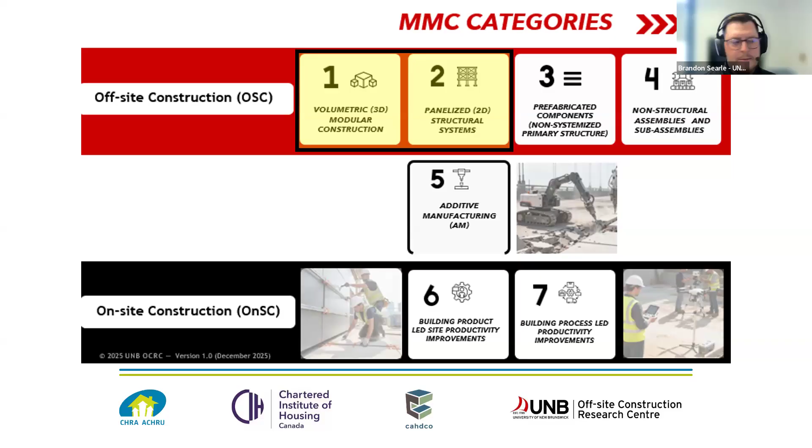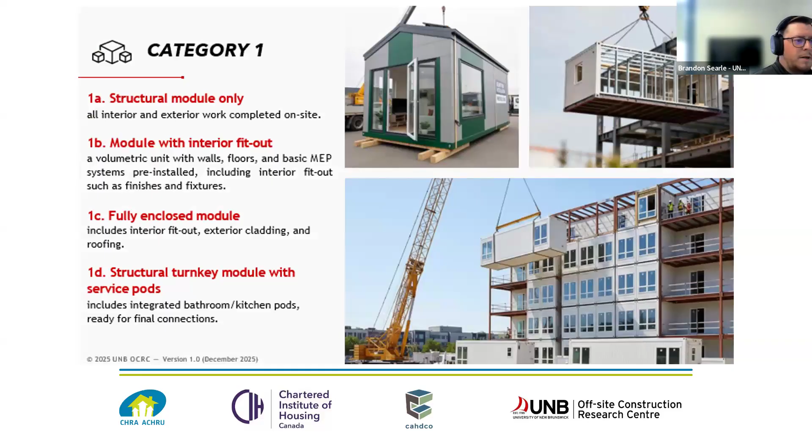Just a reminder of what's enclosed in those. Category one is structural module only, the module with interior fit-out, a fully enclosed module, or a turnkey module with service pods. Category two is structural framing panels, insulated panel systems, a fully integrated panel—so completely closed, I'll say open and closed panels quite a bit—or externally finished panels.

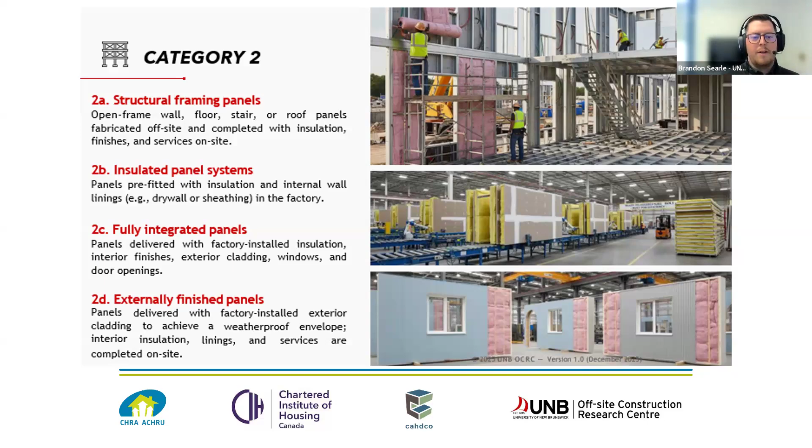So just to note, procurement processes do change a little bit and can be impacted depending on how much, or at what level, of MMC you want to use, or what percentage of it is built in a factory. Last week, I introduced this definition of modern methods of construction, or an offsite construction integrator.

Our experts, the Q&A experts, or the case study presenter later, may or may not talk to this, but it's just a reminder that the integrator can be a general contractor, part of the design team, a new entity that's part of the project team, or sometimes the manufacturer. They have expertise in leveraging modular or prefab methods in a project, and they get involved right from the get-go, often in a relationship like owner to integrator.

And then, Canadian MMC manufacturers: any entity that performs the manufacturing activities within Canada, regardless of whether it is a subsidiary or a foreign company, et cetera. Just mentioning those in case you wanted to use them yourself—those definitions are direct from Natural Resources Canada, from the new offsite construction challenge program they launched a couple weeks ago. So you can use that in an RFP or challenge program that they put out.

When thinking about the MMC integrator, I'll admit I used generative AI to produce this graph—I just wanted a simplified version to show this, but take it as a conceptual figure. Essentially, you can go from an open panel system, which is often about 20 to 25% of your building built off site in terms of project value or building costs, right up to about 90% complete when you go to full volumetric modular. This is based on experience we've had with our industry partners: as more project scope is done in a factory, the importance of that MMC integrator seems to increase. I don't know if it's linear or exponential, but I asked for an exponential curve today, so that's what we ended up with. It's just really important to mention that.

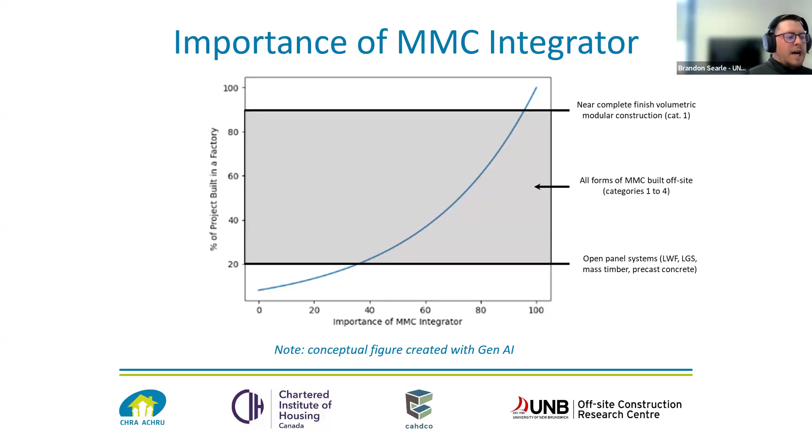And then beyond that, the role of the MMC manufacturer - I want to mention this can be both project and company specific. I've worked with some companies who historically do a lot of single family homes, but they've done a full hotel and managed the whole project.

Whereas I've worked with others who tell me they prefer to only focus on the scope of work that's in the factory. They like the civil work to be dealt with by the general contractor, and the fit out, installation, shipping, storage and everything else dealt with by someone else. We like to focus on what's in a factory. So it does vary a bit.

But in general, we view it as four different roles. They could be the prime or GC, where they do design assist, civil, responsible for manufacturing, delivery to site, install, fit out, handover, everything. They could be the subcontractor that does design assist, manufacturing, and delivery to site, installation and fit out. Or the subcontractor that does design assist, manufacturing, and delivery to site.

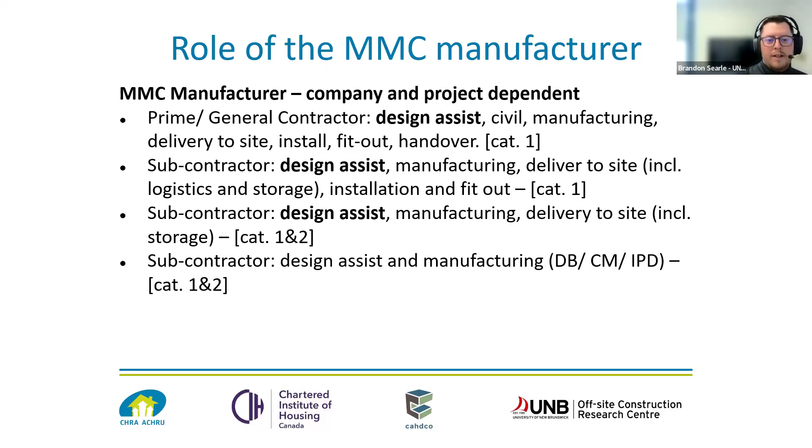Or the last one, which we've seen to be the most successful when you get into the MURB projects, is they're involved in design assist and manufacturing. I put in bold the design assist piece - when thinking about how you're procuring modern methods of construction projects, particularly volumetric modular, it's vital to have that manufacturer involved in the design phase, which does influence how you procure.

I'm repeating myself here, but regardless of the project, design assist is key to leverage all the benefits that modern methods promises. We've seen in open panels and other panelized systems where there's no problem for them to bid on a framing scope of work, whether or not it had been designed for panelization, but you're not optimizing it to its full potential, and optimizing industrialized construction to its full potential.

What we've seen is particularly on projects larger than 8 units - and again it is company specific - each group in the value chain should be responsible for what they do best. We've worked as a research center with over 25 manufacturers across the country, and the majority say if we had an order book and could stick to being responsible for what's in the factory, we can maximize our potential and benefit to the sector.

So many prefer to have an integrator, design team, and a general contractor that already has expertise in this, and leave all the site work to them. If it's a multi-unit residential building, I've heard varying opinions, but in general I've often heard if it's above, say, 8 units, involving a general contractor who has local trade relationships, expertise working with the authority having jurisdiction, and doing all that site prep, installation and fit out is quite important there.

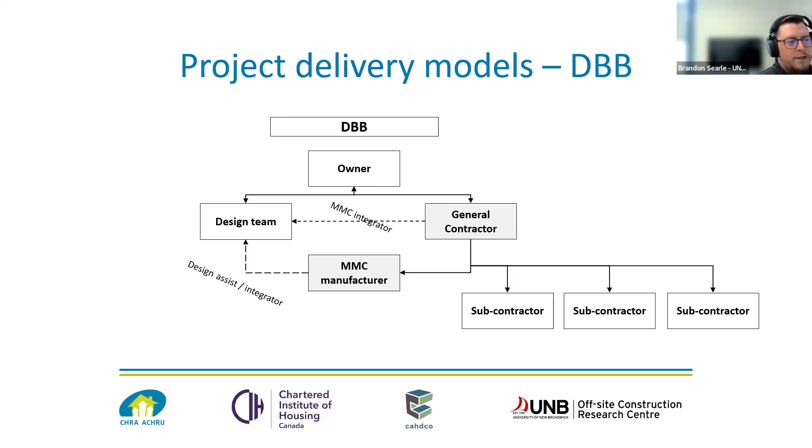So ways to do that is really in a design build. In this case, you would bring the design team, the GC, and the MMC manufacturer into a DB team, and you'd procure for that.

There should be a line from owner to DB team. Sorry about that, no one would have noticed if I didn't point it out.

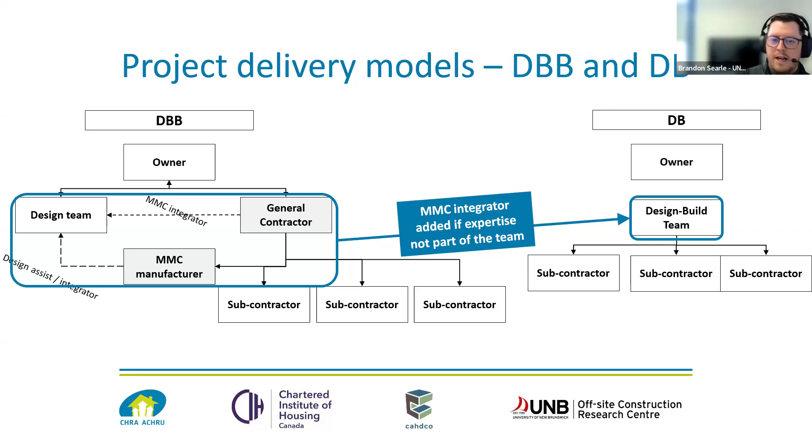There's a project here in Charlottetown I have a picture of later, where they involved the MMC integrator because they had a local general contractor, regional manufacturer, a local architect and engineering team involved, but none of them had as much expertise with doing a 6-story modular building. So they brought in an MMC integrator who's educating the general contractor, has a super and PM on site, educating the owner, and involved in the manufacturing process.

Some challenges: again, if the MMC manufacturer is excluded from any design development discussions, you won't leverage the real benefits. Longer linear duration and schedule, reduced communication between design and construction, often results in more extras. A lot of research demonstrates that. And prescriptive design does not allow innovation or as much innovation in alternative proposals.

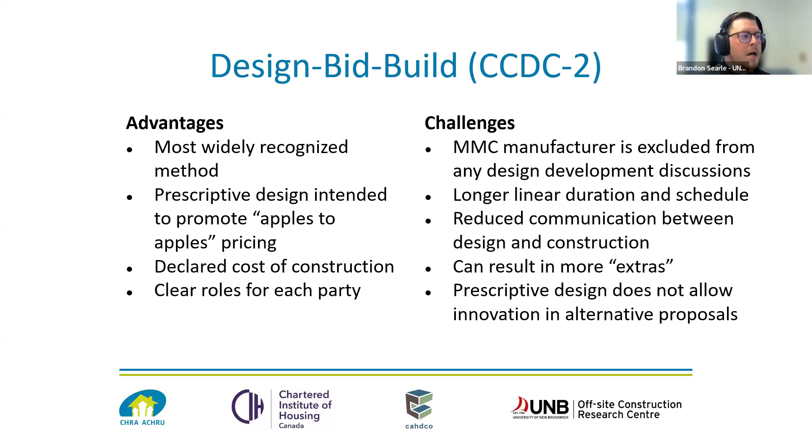From a design build side, the owner contracts directly with the design builder. The architect is contracted by the DB. Integrated design with the MMC builder. Suitable for fast track with immediate feedback and team collaboration throughout.

Challenges, which I really want to emphasize, and Paige has educated me on as well: the proponent must invest significant time and resources during the design phase, and it's not aligned with many programs for affordable housing development. If you're curious what that means in bold, you can ask Paige.

Owner must state a maximum ceiling price, or things can get a bit out of hand. And owners share the design approval responsibility with the DB team, which pushes up more responsibility onto the owner at times. The last one too, which Paige kind of touched on, I believe, is procurement policies.

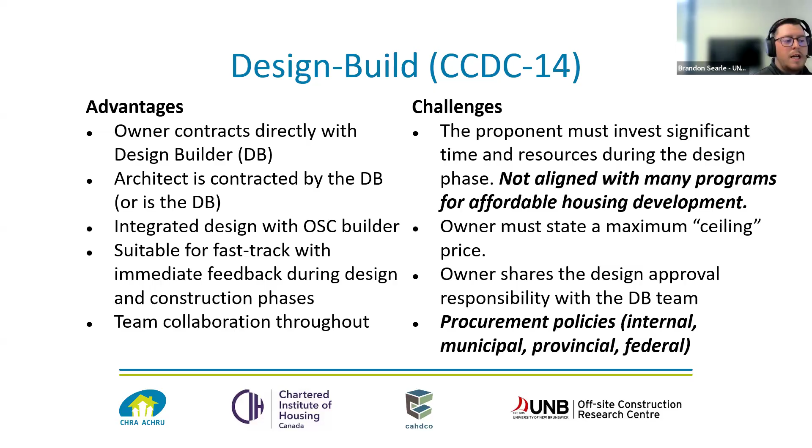There's often programs that nonprofits, housing providers leverage, have their own procurement policies. Municipalities do, federal programs do, and so on. And plus, there's internal ones. So sometimes that becomes a challenge to use DB.

Lastly, I'm just going to go through it really quickly, but IPD is being talked about, particularly in the institutional sector, so schools in particular, and a little bit in the commercial space as well. What I've been told is that this will often produce the best project.

But it's not necessarily the best value for money. So you'll get the best product, but you'll also likely spend the most. And so in this case, you'd have the MMC integrator, the design team, the GC, the MMC manufacturer, as well as the key subs involved throughout.

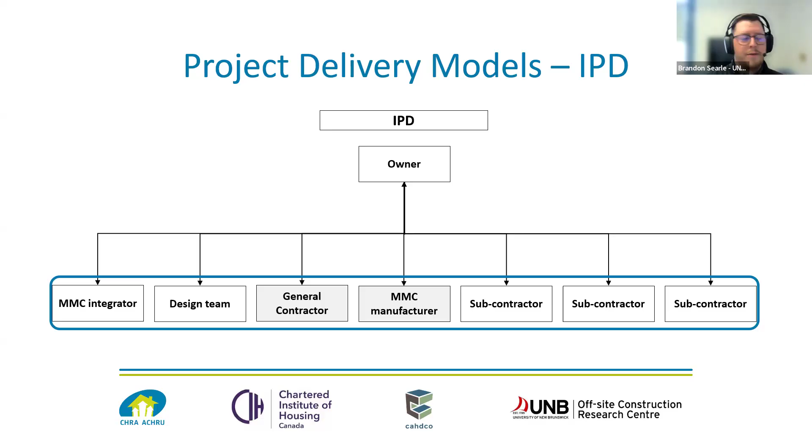Some challenges - a lot of the advantages are a bit similar to DB, but challenges again, not aligned with many programs. There's a lot of trust required, particularly among the IPD team. You're only as strong as your weakest link, and must set a max price as well.

A few other project delivery models that we mentioned: obviously there's cost plus, construction management and construction management at risk. CCDC 5B is what the project was that I referenced on campus here that leveraged mass timber.

And again, to leverage the benefits of MMC, the most effective is when the contract model allows for design innovation, collaboration, and incentivizes time savings. So that's really key when you're looking at this and going a bit beyond a lowest bid wins approach in your design.

This one might be a bit too detailed, but first off, that project is one of two six-story projects in Charlottetown, PEI. It was a design-build project where you have an MMC integrator and the full team involved. I can share more about that project if folks are interested.

DB is the optimal choice because if you're not involved in design-assist, converting from conventional to MMC is very difficult. We've seen it across the country recently with a large developer in the GTA who converted from traditional ready mix concrete to a precast solution. DB allows you to engage the MMC manufacturer early.

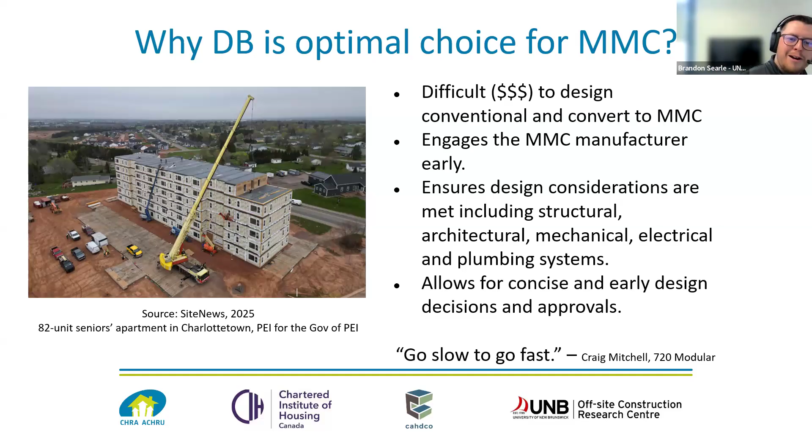I think I mentioned this last week—having design complete is vital before you start manufacturing, because once you start, for example a 16 unit apartment took less than 2 weeks for all those modules to be built in the factory and delivered to site. Craig Mitchell, our Q&A expert next week, always preaches 'go slow to go fast'—meaning go slow in pre-construction so you can go fast during construction. He'll probably speak to that next week a bit.

A few other considerations when looking at the contract for DB and leveraging MMC: payment terms are key. I've seen them more in volumetric, and maybe some of our Q&A experts can speak to this, but they seem to vary, often requiring a down payment early on. Then there are different progress claims that aren't necessarily tied to site progression, but might be tied to completion in the factory. Change orders after design become a problem because they're much more costly once everything is already done and manufactured.

Progress and milestone draws are again tied to your payment terms. Delivery to site—sorting out who's responsible for that and who gets paid at what time can be tricky, especially if the manufacturer isn't responsible for the civil site but isn't getting paid until the module arrives on site.

Transportation, storage, and logistics—I've heard of that becoming an issue on a variety of projects where environmental factors, whether it's too windy to leverage the crane or whatever it might be, cause problems. So that's something to talk about. Maybe Martin can speak to that later.

Then there's the payment certifier. Our Q&A experts could probably speak to this better than me, but I've seen the MMC integrator act as the owner's represented payment certifier. They'll have someone located close to the factory monitoring progress, which tracks how far along it is and when to release payment for the modules.

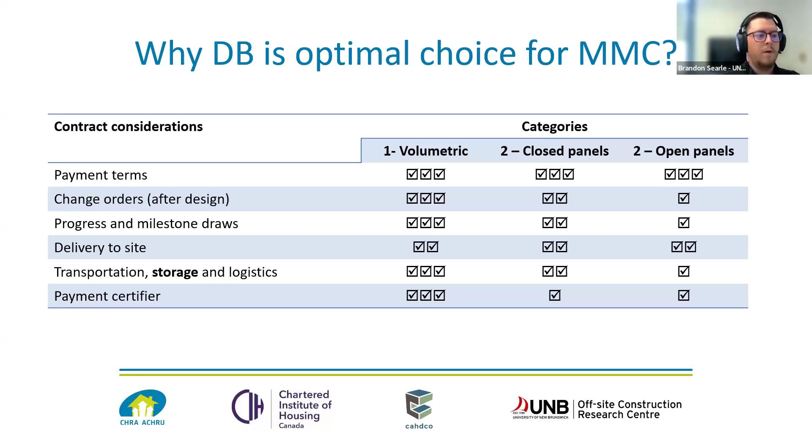Some key takeaways: the type of project delivery and contract depends on geography and project type. There's no one size fits all. Here in New Brunswick and Quebec, the volumetric modular industry is quite mature. In BC, mass timber is mature—it's specific to your region.

An RFI or RFQ is a good starting point. I've heard of some architecture firms doing this and creating their own internal database, almost like this prefab navigator. I'd love to see BC Housing, out of this RFI they announced, create a database that the whole industry can use with details on who does what well.

The GC, manufacturer, and MMC integrator need to figure out who takes on the role of integrator—go back to that definition and decide who's best to do that. It's less important in my opinion with panelized, but talking with that panelized manufacturer, they might be able to educate you on that process. Involve the MMC manufacturer in the design stage—DB presents the best opportunity to leverage the benefits around speed, cost certainty and predictability, safety, and sustainability.

Obviously, those key challenges need to be addressed, and finally, ensure you resolve those contract challenges for design and payment milestones early so that you can leverage it as much as possible. So with that, I'm 4 minutes over time. I'm going to wrap up and hand it back to Paige to run the Q&A with Martin and Nicholas.

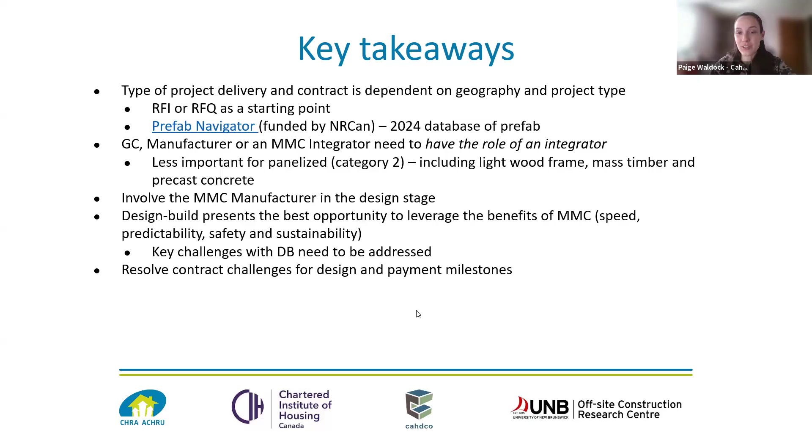At this point, I would like to welcome Nicholas and Martin from EllisDon Community Builders and Maison Bonneville, respectively, to join us. I'm going to ask both of you to give us a quick understanding of who you are, who you work for, what your job is, and why you're here today.

I'm the Director of Public Affairs at UTILE. I've been working in affordable housing for 4 years now. I am a political scientist by trade, so if you have very specific technical questions, I may not have all the answers, but we've been working with Bonneville, so maybe Martin can help me with the more technical questions. I'm glad to see you here.

The presentation plan for today: I'm going to very briefly present who UTILE is and what we do, then present the case study of the modular project we did in Rimouski, delivered in September 2025. Then I have some recommendations on how we can collectively unlock the potential of manufacturing processes in housing. This is a bit of a macro presentation, in the sense that we used the Rimouski project to do research and development on modular construction, and drew some conclusions on what we need to do as an industry to drive the cost of modular construction down. I'll present all of that, and then we'll have time for questions at the end.

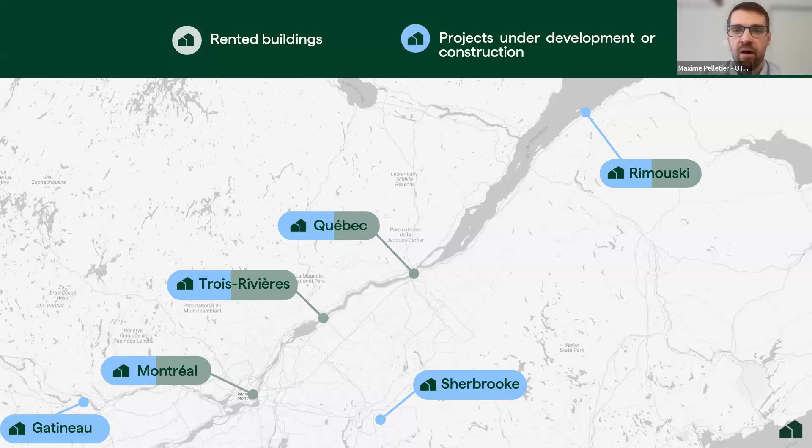About UTILE, briefly: we are a social economy enterprise. We specialize in developing and operating nonprofit student housing across Quebec. Our goal is to develop 600 to 800 units annually, and we started successfully last year. Now we are operating in 6 cities, the most important universities in Quebec. We currently have 5 buildings that are being rented, roughly 750 units, 900 students living in our buildings today. And we have 800 units under construction at the moment, including 500 that we are delivering this year. So we're almost doubling the size of our portfolio in 2026. It's exciting times for us.

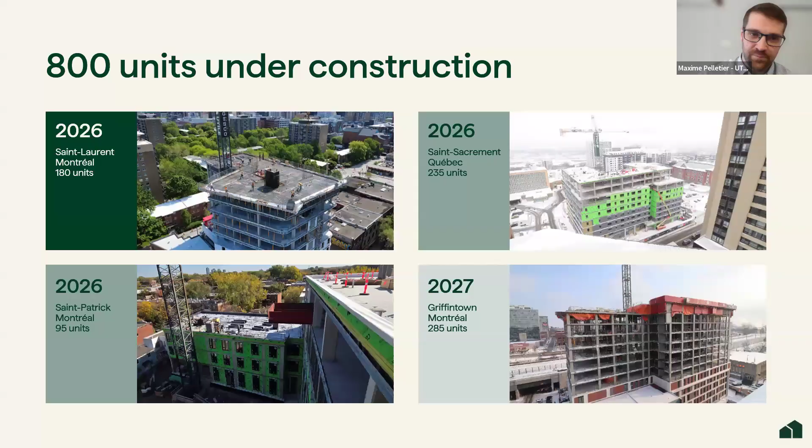To get into the main element: since we started doing student housing, everybody's been telling us, oh, you should do modular construction since you do student housing. I'm not sure where that comes from. I think people saw the container student residences in Denmark or the Netherlands, and thought we should do this as well. It never appeared to be a good option for us. People kept telling us the most amazing things about modular construction. We were told it's 50% faster than traditional construction, it's better quality because it's in a controlled environment, it's cheaper than traditional construction, and it's also greener than traditional construction.

And we said, wow, this is amazing. It's also utterly impossible. So why is everyone telling us that modular construction is this unicorn that does everything better than traditional construction? And if it's so incredible, why does it only have like 4 to 5% of market share? That seems unrealistic.

So at one point came an opportunity in the form of CMHC's Housing Supply Challenge, round 5, scaling up. We applied to this program and got funding from CMHC. The idea was, okay, student housing is potentially a good fit for modular construction because it's small apartments, highly standardized, high volume. So it probably makes sense to use modular construction for student housing. If we get funding from CMHC, we can devote time and energy to truly understand why the promises of modular construction are not necessarily met in reality.

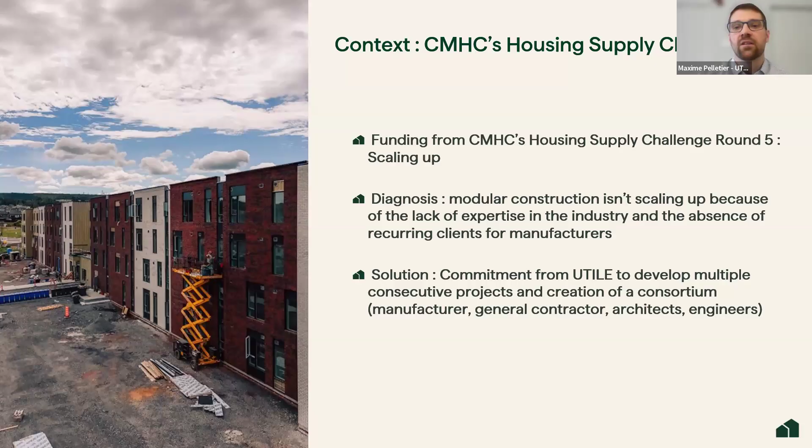And so that gave us the Rimouski project, which is 155 units built using volumetric modules, category 1B or 1C to use the language previously used today. It's 155 units across 4 stories, housing about 185 students. It's mostly studios, but we also have 2-bedroom apartments. It was built with 96 modules at Bonneville Industrie near Montreal, and 62 of these modules were identical.

So it was exactly the same module being built over and over again, which is very important if you want efficiency gains from standardization. The total project cost was about $30.5 million. For the capital stack, we got a subsidy from the Quebec-Canada agreement and a senior mortgage loan from a social housing investment fund, and we got free land from the municipality, which helped a lot.

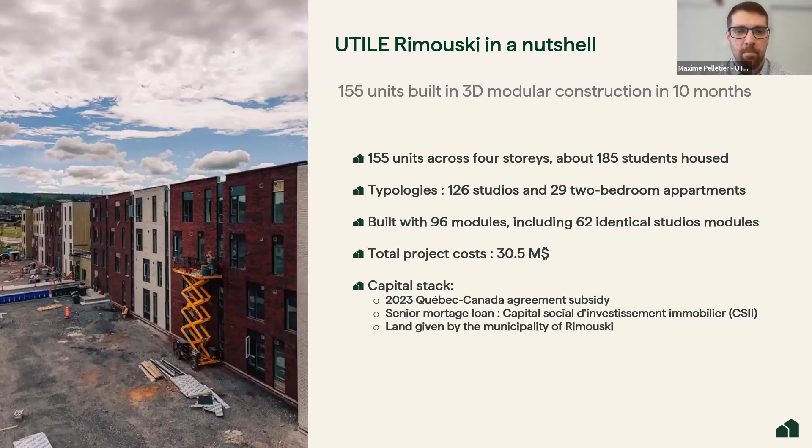So in terms of timeline, that's a big advantage of modular construction, and yes, it was extremely quick. In May 2024, the City Council of Rimouski officialized the transfer of a parcel of land to us. Then we started construction in mid-October 2024, starting on-site and off-site essentially at the same time. Then 10 months later, in August 2025, the tenants moved in. So that's a 15-month timeline from the moment we got the land to the moment tenants moved in, and about 10 months from when we broke ground on site to when tenants moved in.

It's particularly important for us because we do student housing, we cannot start renting in the middle of a semester. Being able to go this fast basically allowed us to open a full school year faster than if we had used traditional construction. So that's a huge win for us.

And the occupancy rate in Rimouski at the time was 99.8%, and students were forced to cancel their study plans at the university there because they just couldn't find any housing. It wasn't even about affordability, it was simply about availability. So there was a very urgent need to have affordable student housing being built there.

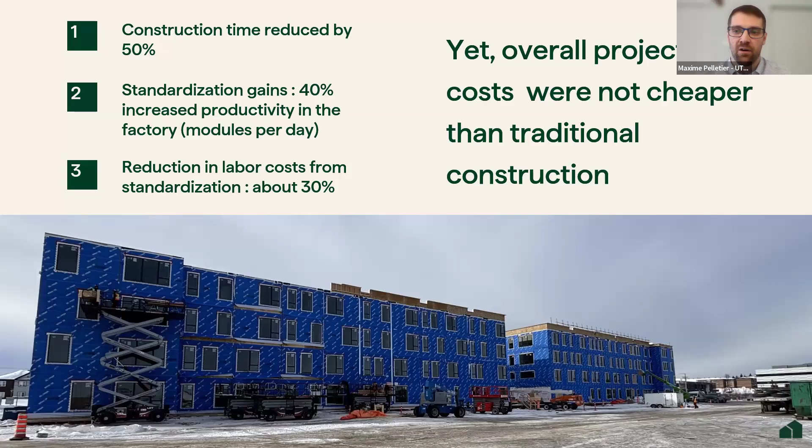One important thing we noticed when doing the breakdown of the cost was that about 43% of the cost of the project was incurred in the factory, and 57% of the cost of the project was still on site. So even though we used volumetric modular construction, it's actually more of a hybrid project where we're still highly dependent on on-site construction methods to assemble the building.

So the most important aspect to understand why modular construction wasn't cheaper than traditional construction in that project is what you have in front of you right now. In terms of direct costs, these are the good news: when we measured how much it cost for mechanical systems, electrical work, interior finishes, doors and windows, we had a reduction compared to a traditional alternative of 9% to 24% of the cost. So doing interior finishes in the factory was indeed more productive and cheaper than doing it on site. Overall, that represented a 7% reduction in direct costs compared with traditional methods of construction.

However, we also had to account for packaging the modules, shipping the modules, and assembling the modules on site, which are expenses you don't have when you use traditional methods of construction, and these basically canceled each other out. So we saved on some costs by using manufacturing processes, but those savings were canceled out by the costs of packaging and assembling the modules.

And then on top of that, you have to add the indirect costs of the manufacturer - the costs the manufacturer incurs for having a plant and staff to administrate the plant and to pay taxes. General contractors have indirect costs too, but I like to joke that it's four people in a tent - they have relatively low indirect costs, whereas a manufacturer has high indirect costs. So about 20% of the cost of our modules was actually the indirect cost of running the plant.

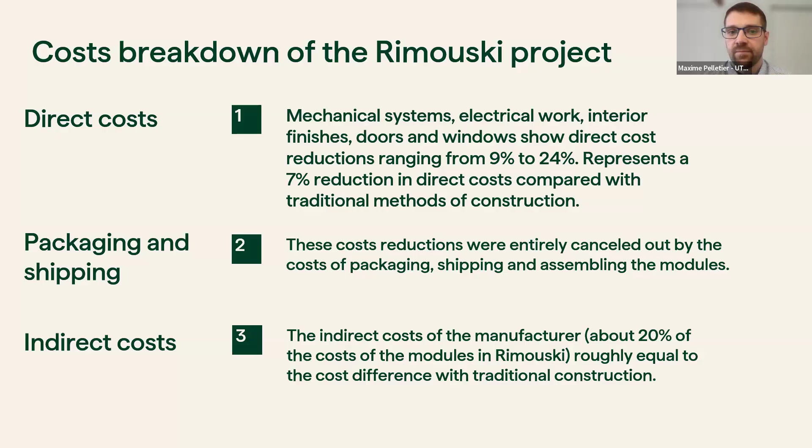And that is extremely important, because what that means is that your project using volumetric construction has costs directly related to the annual volume of production of your manufacturer. The higher the volume of production of your manufacturer, the lower the portion of indirect costs your project has to bear. So as we increase productivity in manufacturing plants, we can expect those indirect costs to go down, and that should allow us to move closer to parity between volumetric construction and traditional methods of construction.

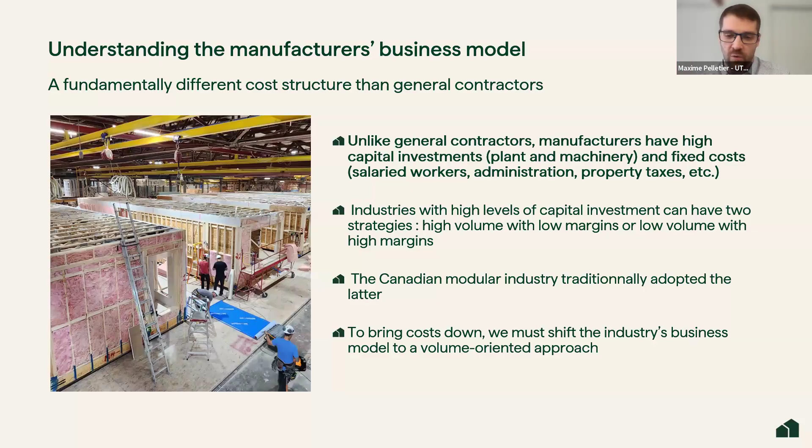Traditionally, this is what the Canadian manufacturing industry has been doing, right? They would do high-end, highly personalized, high quality product. That makes sense from their business model perspective, but this isn't what we need to build 1.3 million affordable housing units in Canada. So if we really want to use modern methods of construction, we need to make that switch from a low volume, high margin business model to a high volume, low margin business model.

So how do we bring costs down? Well, first, direct costs. As I said, we had about 7% reduction in direct costs from using manufacturing processes. We could increase that 7% to 10, 12, or 15%. How do we do that? Well, we can invest in robotization and the efficiency of the plant.

That comes with a warning, because when we looked at international examples, we saw that in a lot of places where there had been massive investments in factories without the guarantee that demand would follow, they tended to go bankrupt. This may not be a message for the people in the room, but when we meet with BCH, we tell them: it's great that your plan is to invest in modular construction, but make sure that demand follows any capital investment.

To increase productivity, we could increase the proportion of the work done in the factory. As I said earlier, our split was about 43% in factory, 57% on site. When we look at Sweden, they have a plant that does about 52% of the work. So as we move more of the work into the factory, where processes are optimized, we can drive costs down. And standardization is better with higher volume.

So if you're doing 18 units, maybe you have 7 or 8 modules that are identical. By the time the production chain is optimized for these modules, they have to change it again. Whereas if you do 155 units, the manufacturer will produce the same modules over and over again, and they get more time to optimize the production chain and squeeze out as many economies of scale as possible.

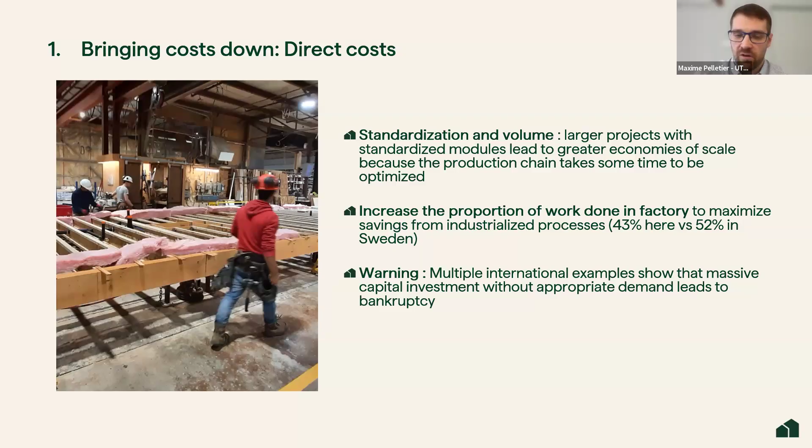In terms of indirect costs, well, I've said most of it already. The indirect cost is divided among all the projects being built in the factory in any given year, and as we increase productivity and volume of projects, it drives costs down. However, our experience as a developer who wanted to commit to being a good customer and provide a predictable stream of orders is that the lack of predictable funding makes it impossible for us to provide that predictability to the manufacturer.

And so if we truly want a productive industry that produces at scale, we absolutely need to change the way public funding works for affordable housing. I know that in the affordable housing sector we've been asking for predictability for basically forever, but this is different. The lack of predictable funding for traditional projects is inefficient, but for modular construction, it's a deal breaker.

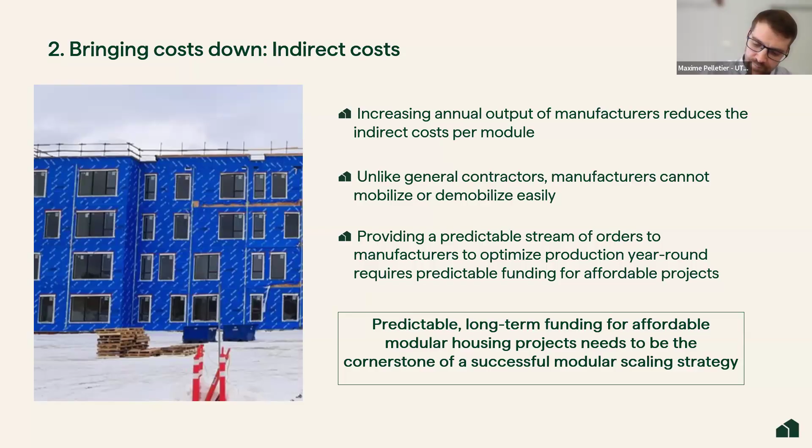We're really trying to drive that point across: if we're serious about scaling up modular construction, we need to start with predictable long-term funding so that we, the owners, can give predictability to the manufacturers in terms of how many orders they're going to have, so they can increase their annual output and reduce the indirect costs for all of those projects. And finally, as discussed earlier, we also have to do something about financing costs.

As has been said, basically no lenders currently want to finance the deposit and upfront costs associated with modular construction. What ends up happening a lot of the time is that the manufacturers themselves will borrow the money at a high rate, and they have no choice but to pass that cost down to the owner, which ends up increasing the costs of the projects overall.

So what we are working on at UTILE is a sort of movable mortgage that would allow us to guarantee the loan for the deposit. The lenders will consider that this is not too risky anymore, and they would accept to finance this project at a lower cost than what is being currently incurred by the owners.

If we do all of this, we are confident that we can have the costs of modular construction being closer and closer to the cost of traditional construction. And when this happens, we can build twice as fast for a similar cost, and that will be incredible, but we are just not there yet.

And so that would conclude my presentation. I want to say that we are working on a white paper that will extend on what I've presented today, and it will be available publicly in French and English at some time in the future. If you want to have a look at it, just follow us on LinkedIn and we'll make sure to tell everyone when it's out because we had public funding to do this research, so we are highly motivated to spread the news about what we found out. And that's it, thank you so much for all of that.

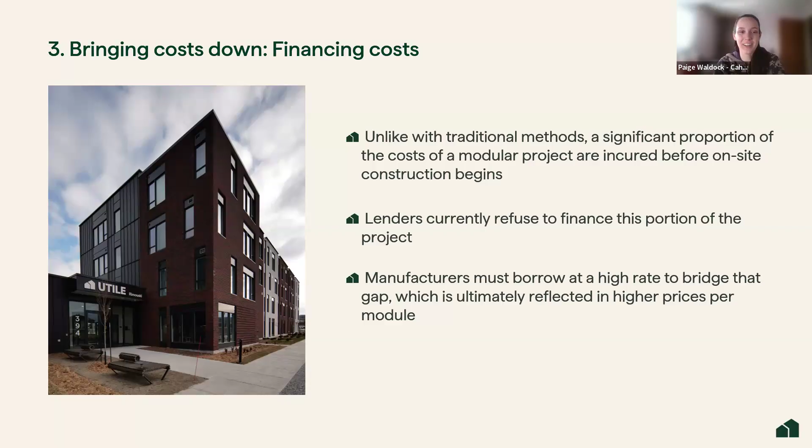I found that so interesting and so enlightening, and I definitely will be making sure to watch out for that white paper. At this point in time, I know we're closing in on the end of our time with us, so we have a couple of questions popping up that I'll probably, Maxime, if you don't mind spending another minute or two with us, we might address.